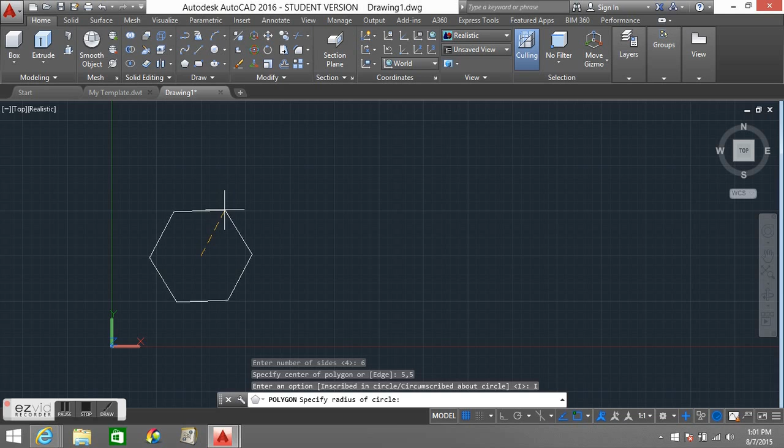Now we want to push inscribed in circle. You can make the radius as big or small as you want. I'm just going to make something that looks proportional in size and try to make the lines straightish. Next thing we're going to do is make a circle.

With this circle, we're going to use that same center point we used for the polygon, 5, 5. For the radius, each one of these squares represents 0.5, so if I put the end of the circle right there, our radius would be 2.

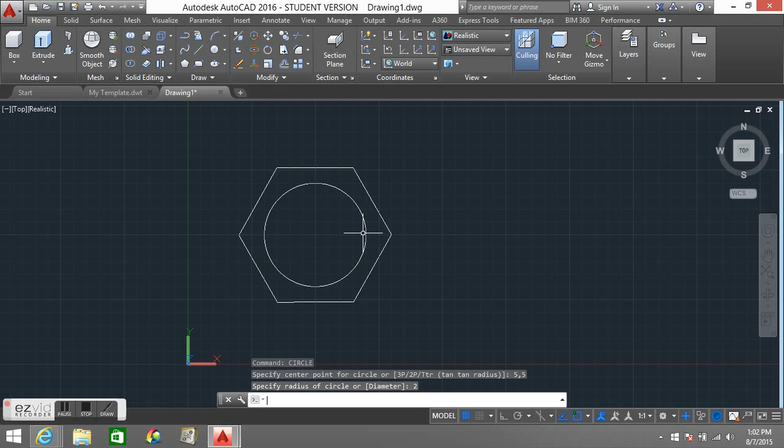Next thing we're going to do is extrude the polygon. I'm just going to make this proportional, however big you want.

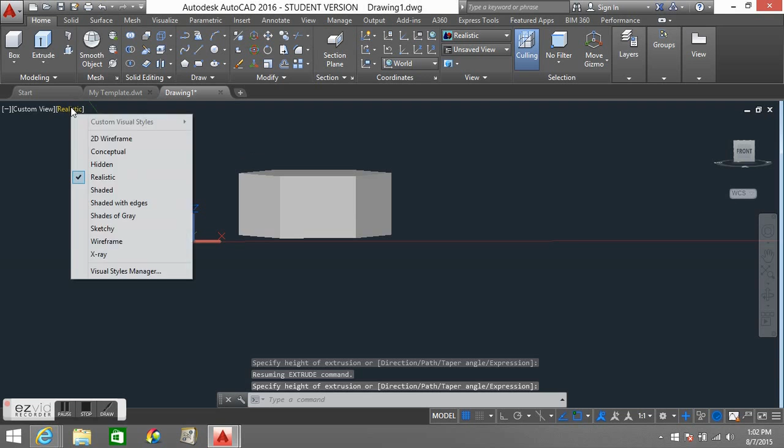Now I'm going to switch to 2D wireframe so we can see the circle and select it. We're going to extrude it as well.

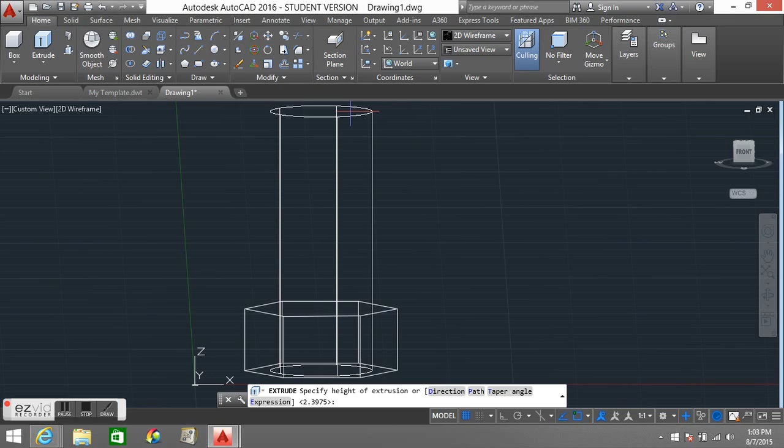Now with the circle, or now the cylinder, we need to remember the height of this one, so I'm actually going to enter a height that's proportional to the bottom, or the polygon. I think I'm going to enter 10. That'll be a reasonable height since the polygon was extruded 2.4 rounded.

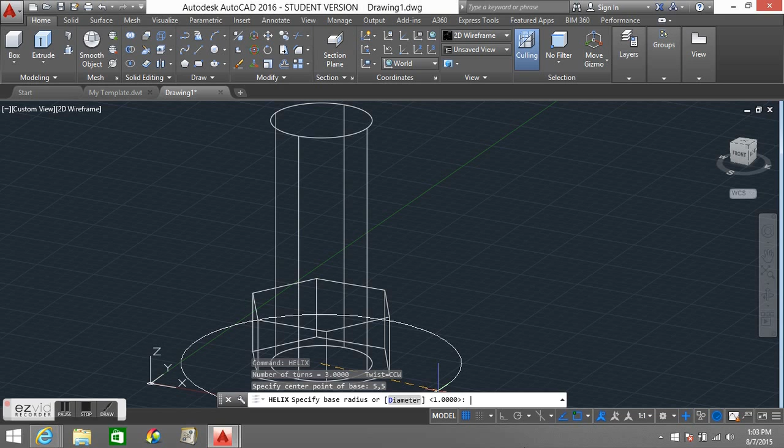The next thing we are going to do is enter a helix into our shape now. For the center point, we use the same 5, 5. For the base radius, it's going to be 2, and the top radius will also be 2. Then our height is going to be 10.

Our next step is, if you look, you can see, as AutoCAD likes to refer to it as turns, how many times it goes around the cylinder, the helix. So right now AutoCAD would say it had 3 turns.

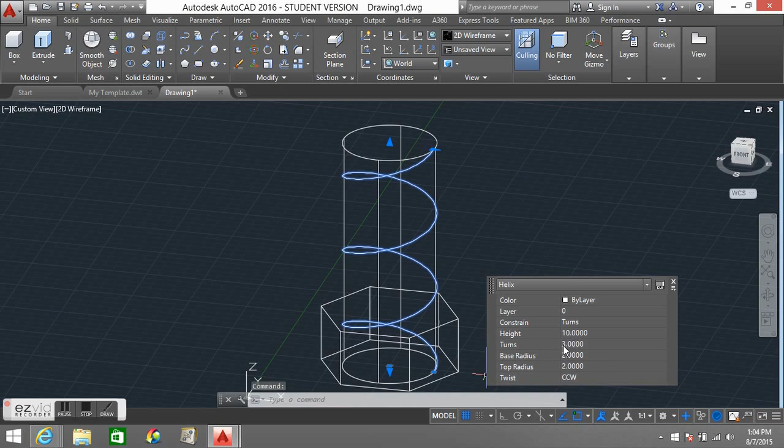So if you want more turns in your helix, you would right click, go down to properties, then go to turns, and we're just going to put 20. Now you see how it has a lot more turns.

Now our next step, you can do this many ways, but this is just the way I like to do it. You're going to make a circle off to the side.

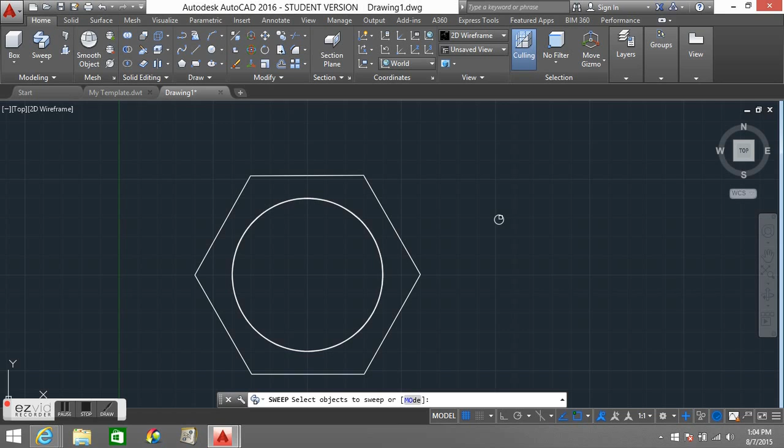Just make a kind of small circle, not too big. Then you're going to push on the top left corner, go down to sweep, and select that circle, press enter, and rotate the screen.

Click on your helix, then switch to realistic view, and now you can see it's got the right shape and whatnot.

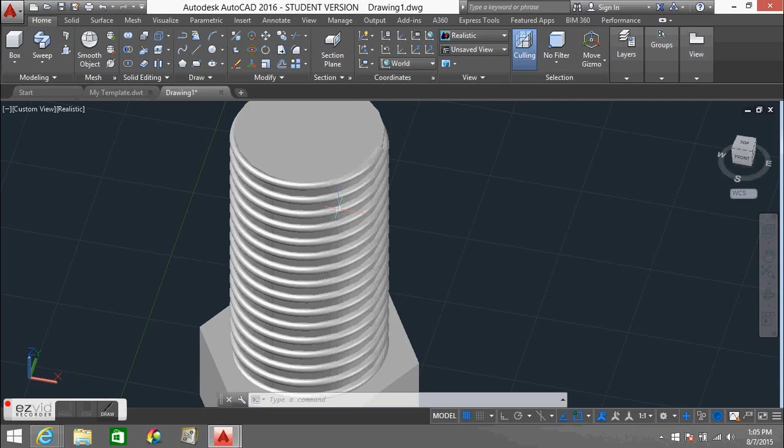As you can tell though, doing that kind of makes your helix stick out further than the cylinder does, and it makes it at the bottom as well.

A quick way to fix that is we're going to go back to 2D wireframe and make a circle at the top of the cylinder. It doesn't matter how big, you just need to make it wider than the helix goes. Then extrude that circle you just made.

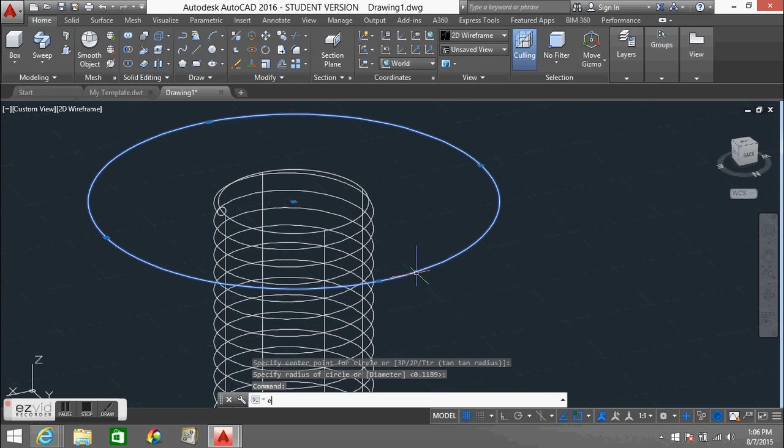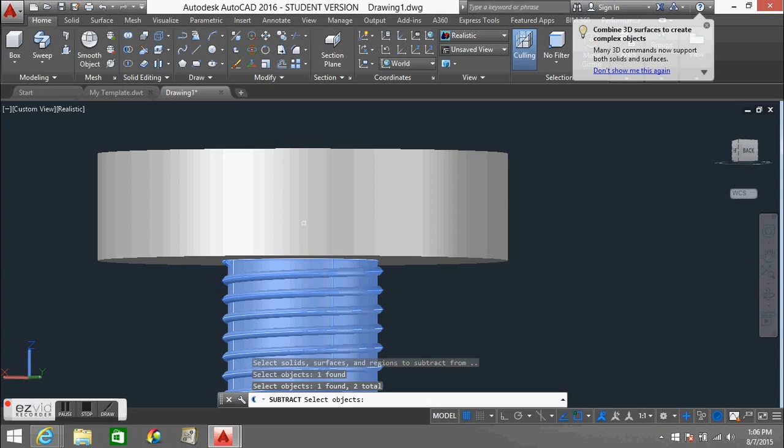And then this is what we're stuck with now. The next thing we're going to use is subtract. We're going to select the helix and the cylinder, press enter, then select the cylinder we had just made, and press enter. Now it flattened out that top of it, see, it's flat completely. Now we're going to do the same thing for the bottom.

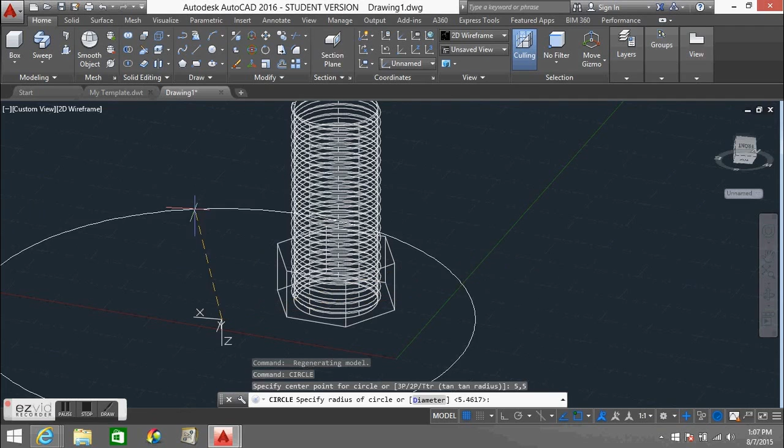Oops, that's what happens when you type in wrong numbers. Sorry about that.

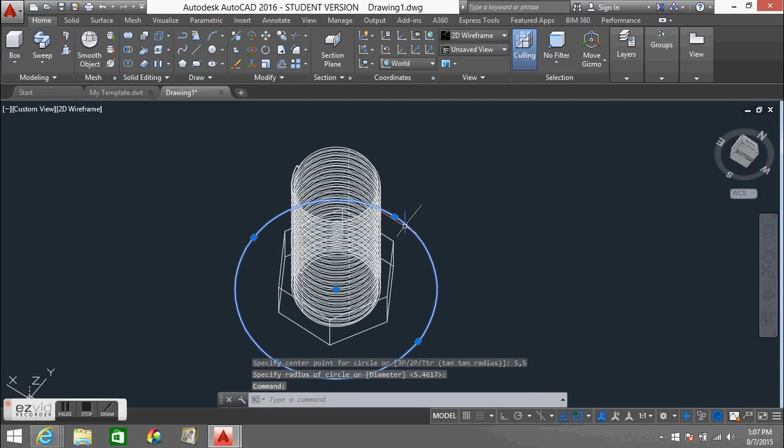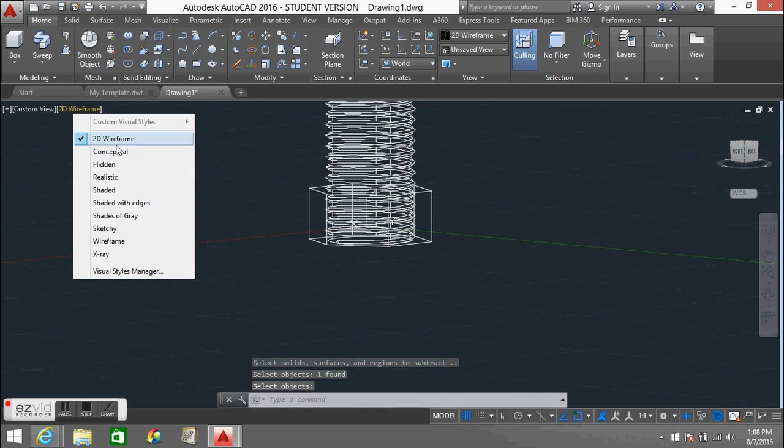Now we're going to extrude this one the opposite way. Then subtract the helix and the cylinder from the new cylinder we just made. Now it flattened out that bottom.

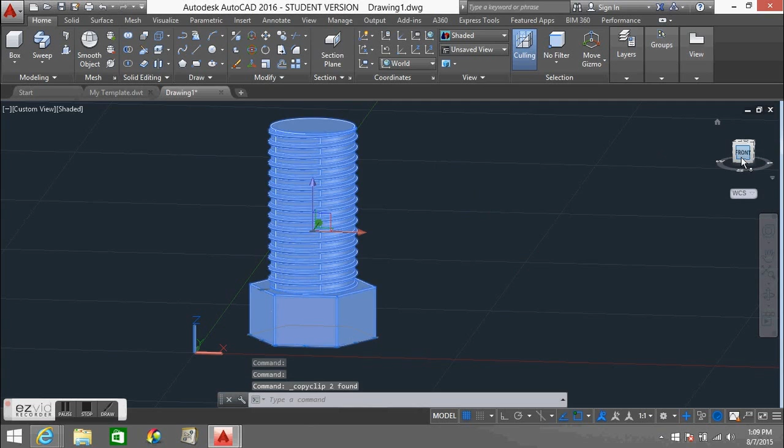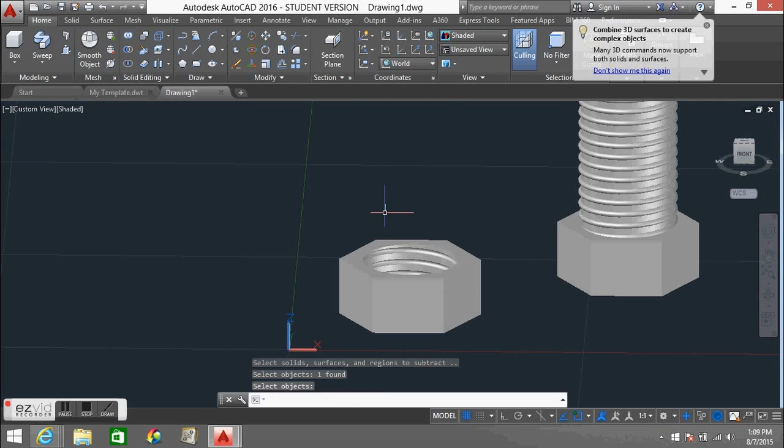Now we're going to click the bolt, the cylinder, and the helix, then copy it and place it somewhere next to it. Next, we're going to subtract. We're going to select the polygon, then select the helix and the cylinder. Now we have the same shape, so if we were to put this on top of the image on the right, it would screw on perfectly.

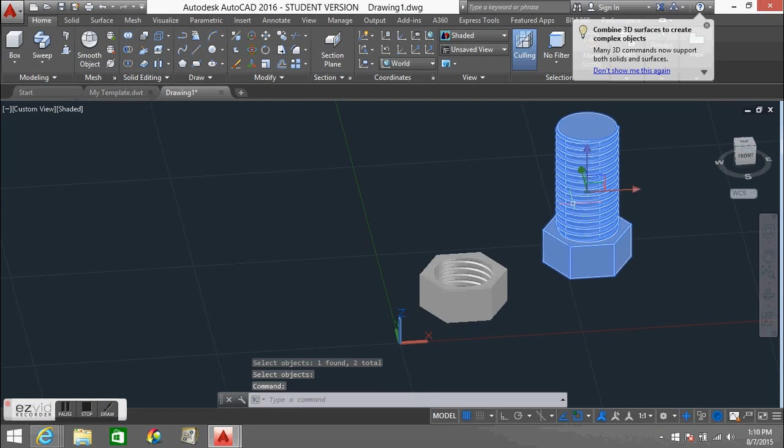Here, first we're going to union. Union is what you use to make 3D objects connect. So we're going to union the image on the right of the polygon and the cylinder, and now it's one object, so no matter where we click, it highlights the whole thing.

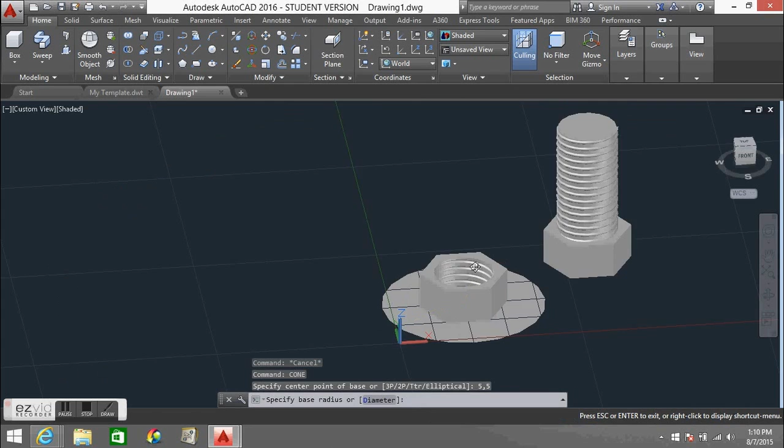Here we're basically done. Anything else we do is just fine tuning and making it look more realistic. So let's add a cone. We're going to use that same base point, 5, 5. I'm just going to make it about yay wide, and extrude it to where the top corners still kind of show.

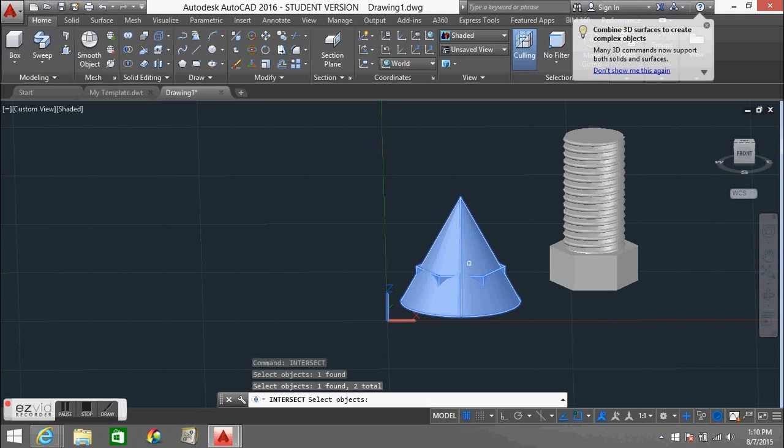Now we're going to use something called intersect. Let's select the polygon and then the cone, and press enter. Now it gives it like a neat little shape that you might see at Lowe's or somewhere, a hardware store.

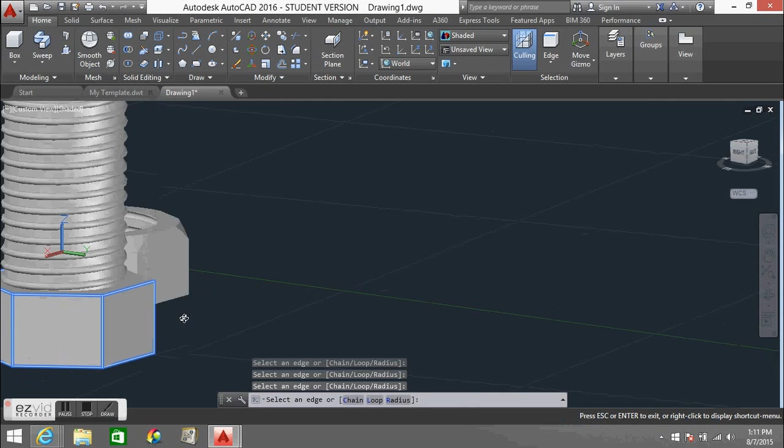Next thing, you could do that for the bottom too, I'm not going to, just for time reasons. Next thing I'm going to use is the fillet command. I'm going to select that edge and just use a random radius, doesn't really matter which one you use. I'm going to select all these corners of it, or edges per se, and then press enter. It'll just give it a nice little rounded shape.

That's basically how you make a bolt and nut in AutoCAD. Thanks for watching.